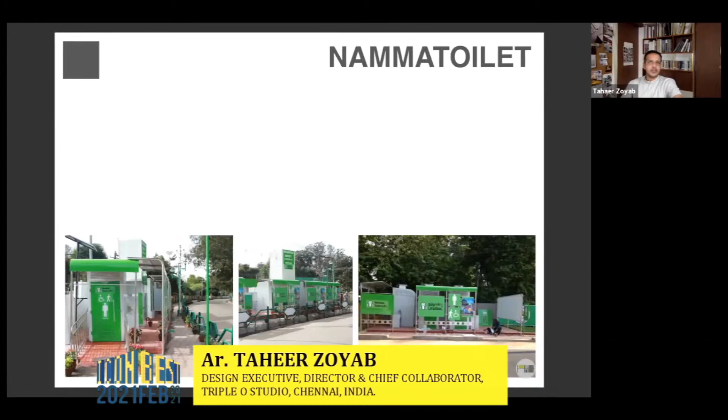So I'd like to start my presentation today with this project. This particular project, the Namma Toilet project, is a project that's very, very close to our heart, because while it is a public toilet and one would think that a project of this scale can be done pretty quickly, this entire project and the process took us about 2 years all in all to realize.

And what this project did more than anything else was cement our interest as a design studio in our understanding of collaboration, in our realization that collaborations are the way forward in case we are all wanting to up our level of quality in our work.

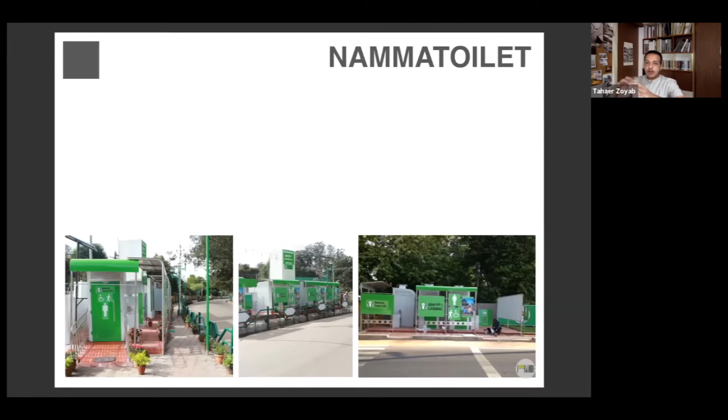So I say this because a project of this scale itself had a graphic designer, it had an industrial designer, it had a product designer, it had us as architects, it had a sanitation specialist, it had a fabrication specialist, and all of this was under the purview of the Commissioner of Municipal Administration, who looks after the ongoings of the state.

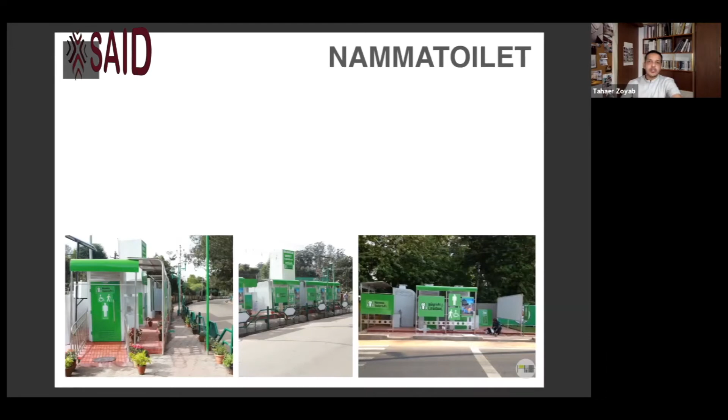And this was also from a studio's perspective an introduction to working in the public realm. So for me, this project is always going to be close to our heart, and we're very proud of the fact that this was awarded one of the highest and best practices in hygiene in the country.

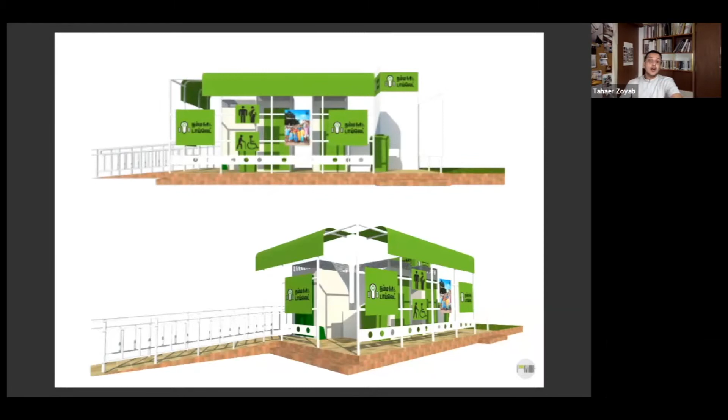Post that, as a studio, we continued this journey of working with as many different minds, as young minds as possible. I've always been interested in academia, and I continue to teach. And more often than not, our studio became the equivalent of a co-working space. We would all get together, exchange ideas, push ourselves in our own understanding of what can be done in terms of architecture. And there was exploration in terms of materials. We were questioning everything that we knew and understood in terms of spaces.

And this particular project also, it was called Design Against the Elements, and it was a project in Manila where we had to design public housing.

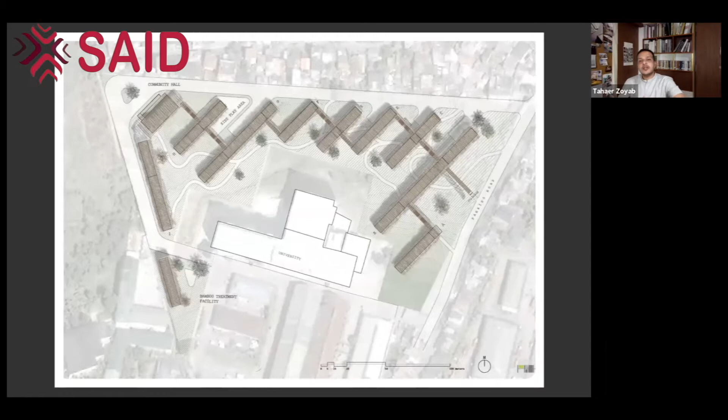This was the layout, and this essentially was housing for the university itself. So we had to accommodate all of the other elements, such as a play area, community hall, etc., within the entire housing block.

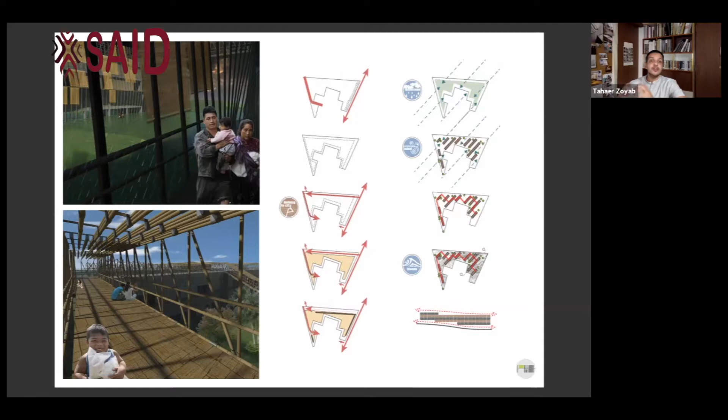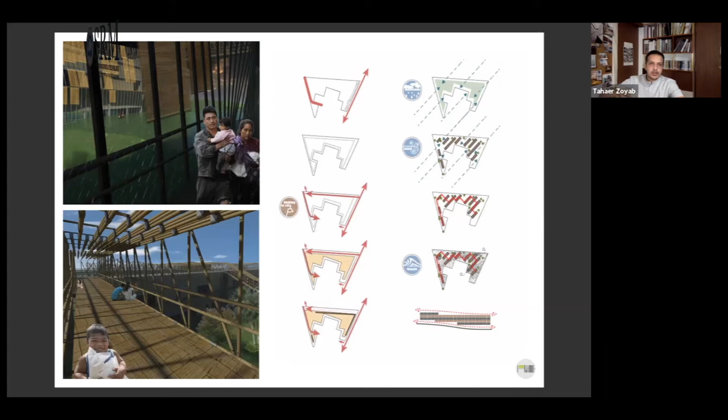The key thing, the reason it was called Design Against the Elements, was to ensure that this built structure would perform fairly well and keep people safe during a monsoon, heavy winds, or floods, which was very common in this area given the natural contours of the space. So we did not want to cut and fill the entire site and create issues for other areas, but essentially respected the natural contour and elevated our buildings slightly to prevent that. We spent some time exploring detailed cross sections.

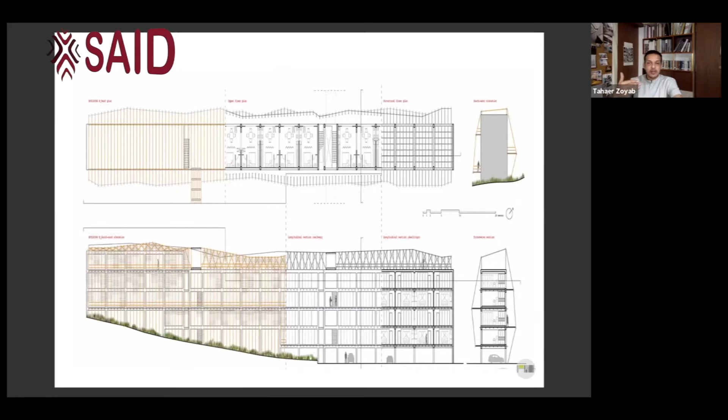What is interesting to me about this project is that the entire common corridor doubles up as a balcony and a congregational, social space in this design. All of the compact units are designed in such a way that there is a possibility for them to engage with each other, which we thought is something of a lot of meaning in a housing project.

We continue to push our understanding and our design journey in terms of creating spaces with dual character, or multiple characteristics, with the Spire Tech competition as well, where the larger brief was to essentially design an IT complex in Gurgaon. But Gurgaon, as we all know, Gurugram as it's sometimes called, used to be nothing but agricultural land before.

So we questioned whether we could find a way to bring some of that in, and create a marriage of that along with the high-tech infrastructure that's also coming up in parallel due to the sheer demand of this in a place like Gurgaon.

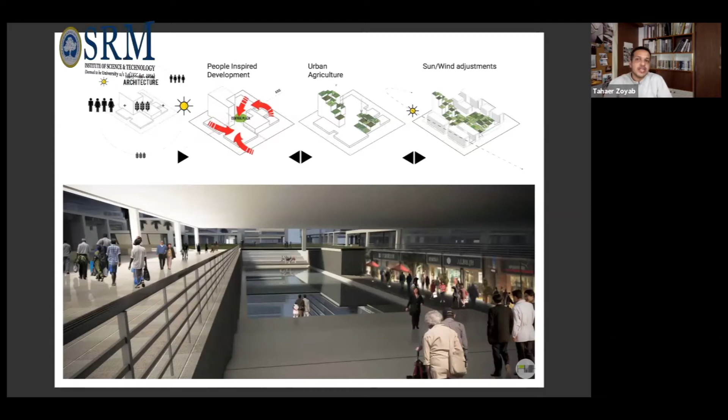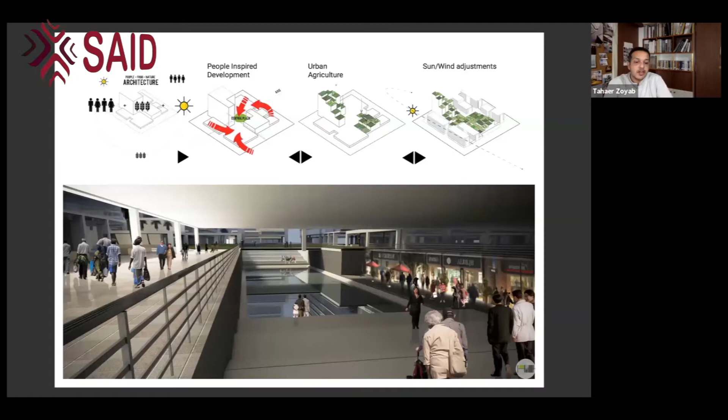So a lot of our early days as a practice and as a studio went into a lot of these explorations through such work. I'm not going to get into the details of the competition itself, but to summarize, we wanted to ensure that we activate a larger central space that is accessible to all, and we use as much staggered terrace area as possible to respond to the natural environment and conditions for urban agriculture. This was our first dive into understanding urban agriculture at this scale.

Coming to this project again, it's called Shift Focus. I think it's very aptly named because the project was to come up with ideas to look at what would make an ideal Indian street or an Indian road.

The diagram on the left suggests how, although most of our roads are made up of people like you and I that use these roads, a lot of the priority is given towards motor vehicles. This was something that we were constantly questioning, because there are so many things at play here, because the way we experience spaces around us, the way we experience our cities, is fully dependent on the way our experience on the road is.

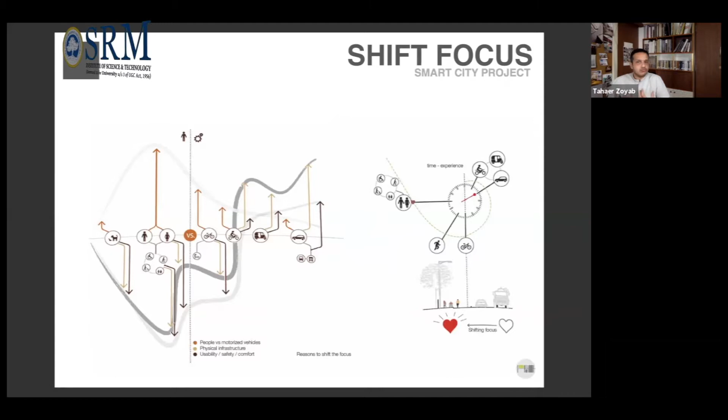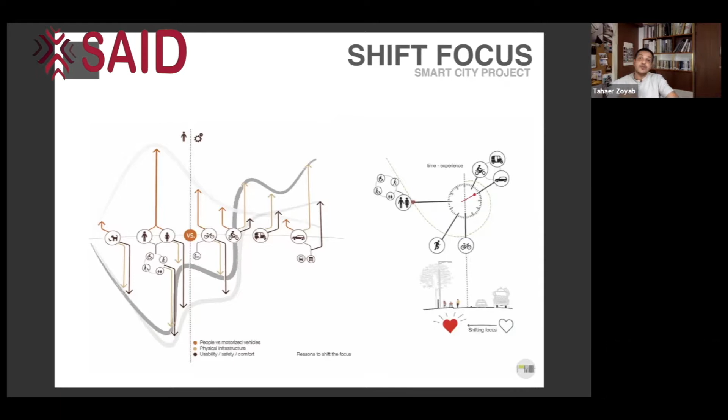If somebody is walking or jogging or cycling, the time that they have to enjoy that experience gets significantly more. And that itself is great reason for us to shift focus, which was what we were trying to do with this particular project. This was a project that we won.

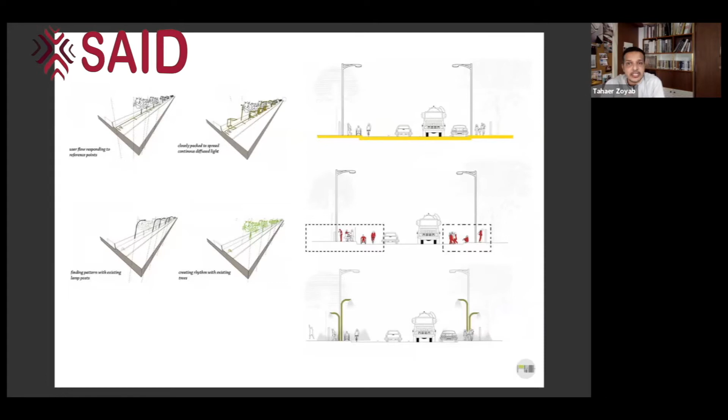These are some sections that highlight the importance of lighting, the importance of the way our roads are structured. There's not enough focus on people that may be physically challenged, and not nearly enough focus on a smooth transition or NMT in general.

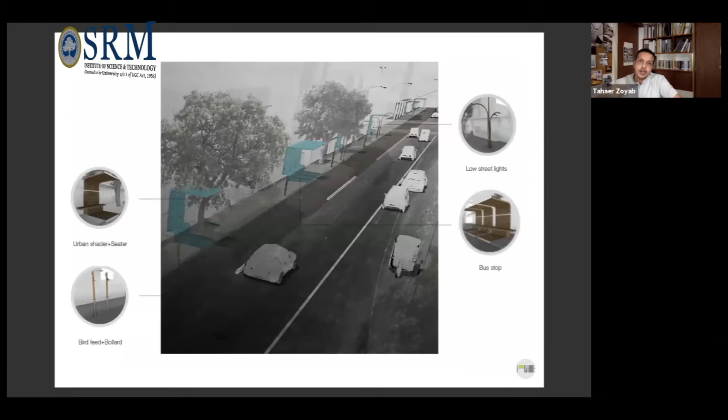In this particular competition, we again explored materiality. We used bamboo as a very unique idea to see whether that could work as a material in an urban context as well.

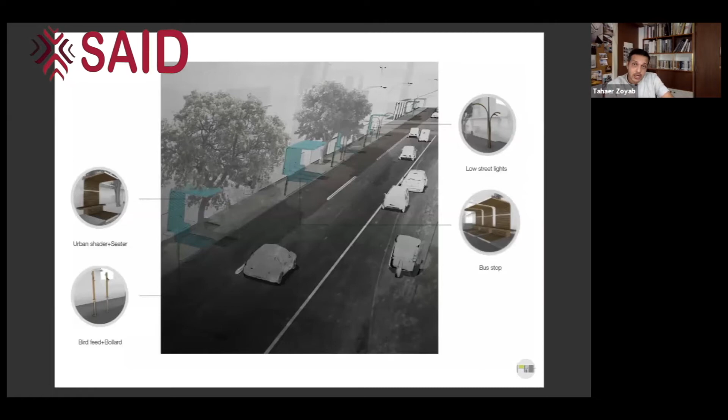These projects slowly led to this very interesting assignment, which I'll call a project called Houses of Mylapore, where I was called by a journalist, a friend of mine, to conduct a small little walk around Mylapore.

In spite of our studio being close to Mylapore, and me living close to Mylapore, walking through some of those narrow lanes was such an eye-opening and mind-blowing experience, because that really drove home the point of how little, especially as architects, we engage with our surroundings, be it immediate or larger surroundings. I think that is so crucial to the way we practice as well.

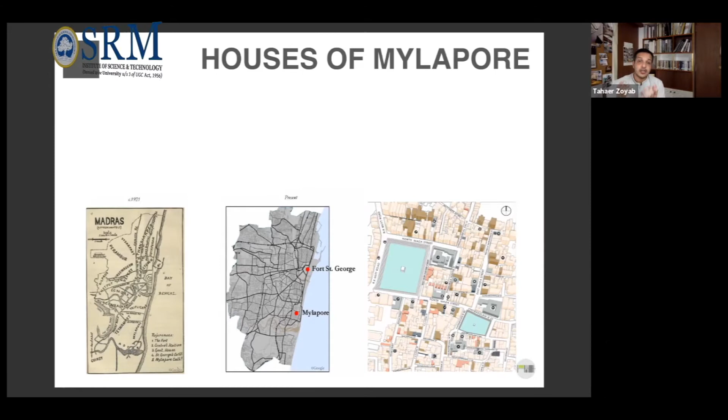So this opportunity was wonderful. We had a beautiful heritage walk in this area. We spent a lot of time researching the architecture, the evolution of Mylapore as a neighborhood itself, and we created maps like the ones you're seeing on the bottom right. One thing led to another, and we started getting obsessed with this.

The reason for this obsession was also something that shook us up very badly, which was we did the same walk a few months later, and within that span, a lot of what we saw before didn't exist anymore. These houses had all just disappeared. I think one of the reasons this doesn't come into the public realm or public news is because these are mostly in the residential segment, but there is such beautiful architecture to be celebrated in our city.

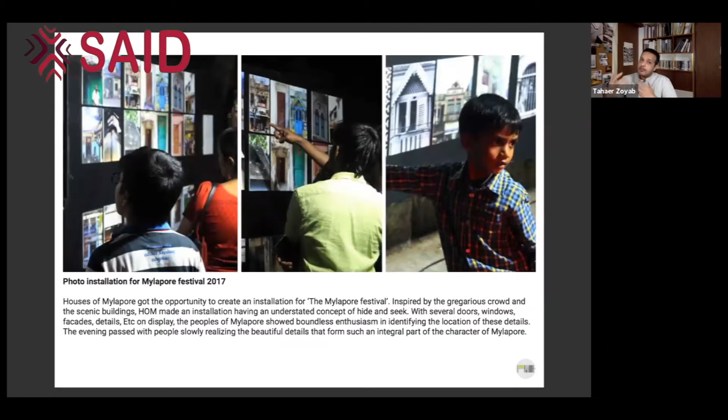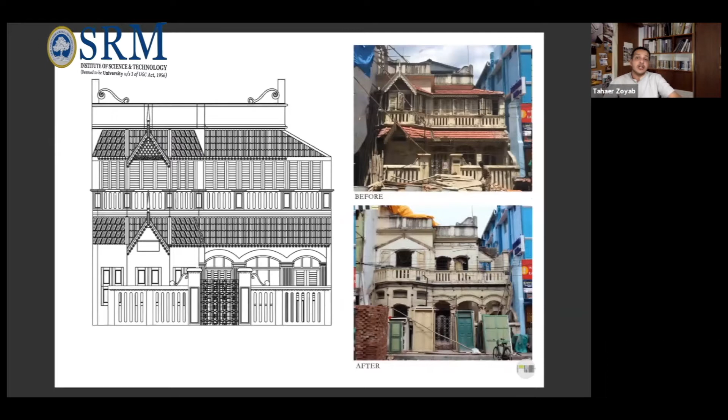We decided to scale this up, and this, in a sense, planted the seed for many of our projects which work in the heritage space, and eventually planted the seed for one of the initiatives we started called Madras Inherited, which I will talk to you a little bit more about moving forward.

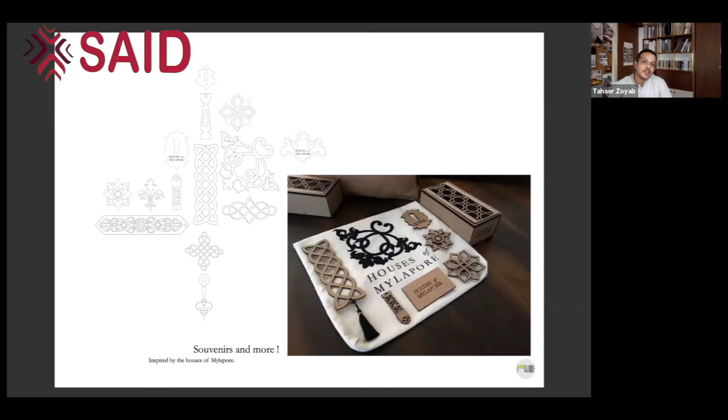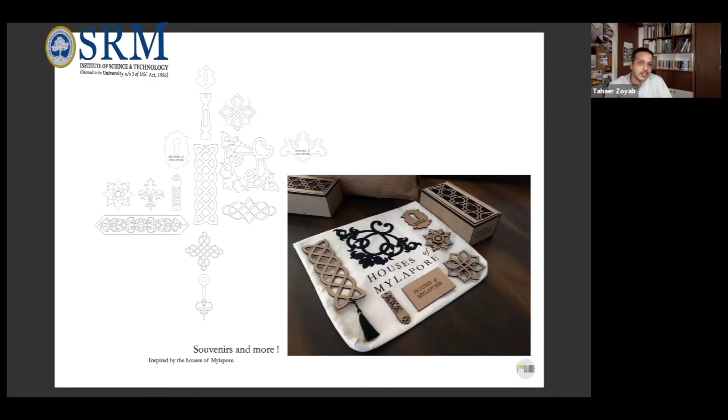This obsession and this celebration of the city translated into so many more things, such as souvenirs and custom designed, building inspired and built-form inspired souvenirs that we make now. These are things that we're very, very excited about as a studio.

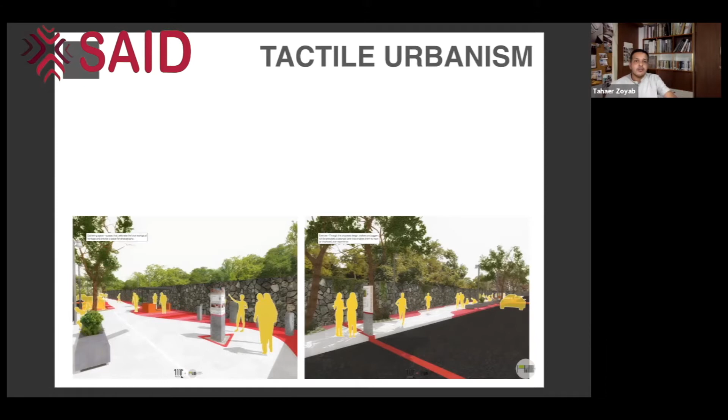Madras Inherited now collaborates with Triple O Studio to work on small scale urban projects, where the larger goal is to celebrate the city through heritage especially, but to also activate residual spaces and dead spaces in the city. We have so many examples of them all over most of our urban context, and this is a small proposal that we hope to see completed in a few months.

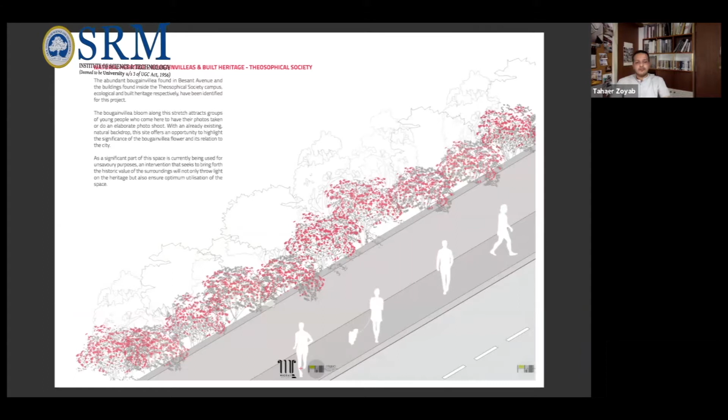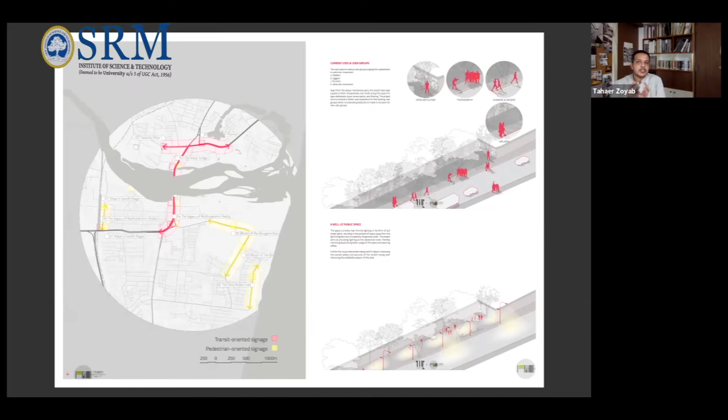Which is along the Besant Nagar stretch. If anyone is familiar with Besant Nagar, it is a neighborhood in the south of our city, which in a sense is enveloped by a large green lung space called the Theosophical Society. We essentially work with the compound wall of that and the road space, and we identified a small area that was being used badly.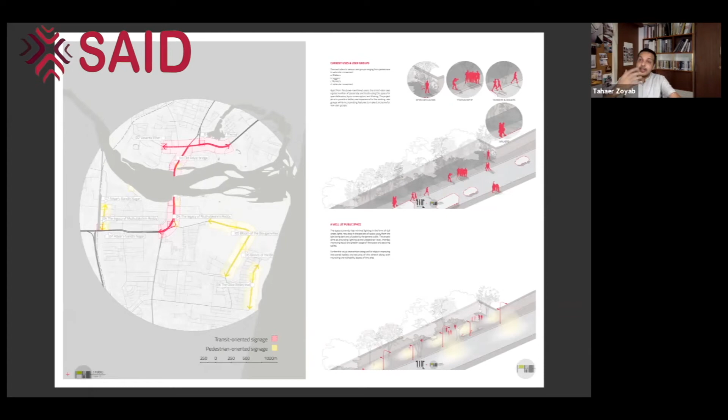It was being used as a spot for open defecation, in spite of being a popular spot where a lot of people would stop and take photographs. The bougainvillea is a beautiful flower that we had here, so in a sense this space that we created was a tribute to the bougainvillea. It's a tribute to the Theosophical Society, which acts as such an important part of this geography itself.

And our experiments and our work in trying things that were never done before continued at this particular project as well. It was very exciting for us because while some of the work I've shown you may be large in terms of its urban impact, I think as a studio we definitely think from pin to piano. We are obsessed with small scale product design as well.

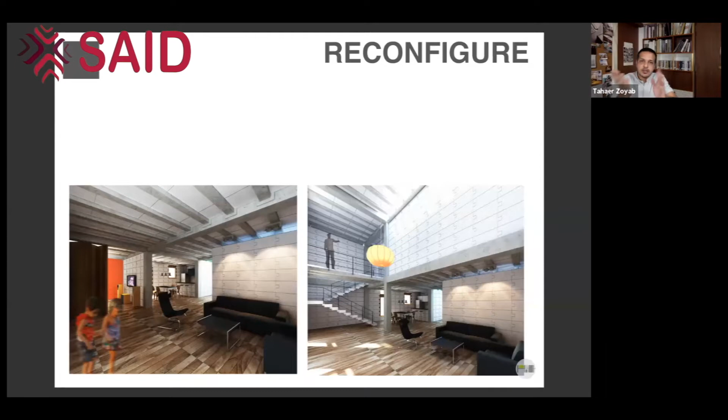This particular project was about how to create a house that could be flexible. So we called it Reconfigure, and we came up with detailing using aircrete and reinforcement rods to create wall surfaces that could easily be assembled and easily shifted elsewhere. This rendering in front of us explains how a normal living space could suddenly become a double height space as a result.

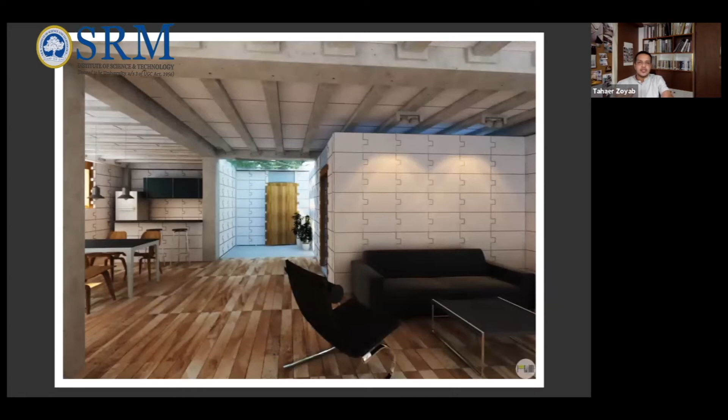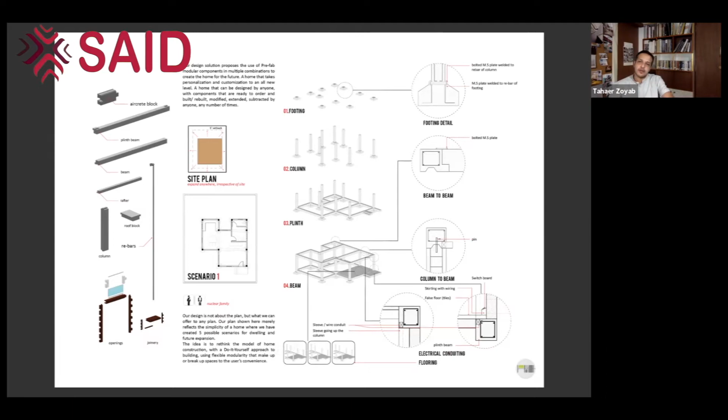These are some more views. I may not get into too much of the technical explanations, but on your left is essentially the toolkit that we used, and on our right are details as to how we envision making of the building. These are suggestions on how the detail itself would work for the wall, and how waterproofing would essentially work.

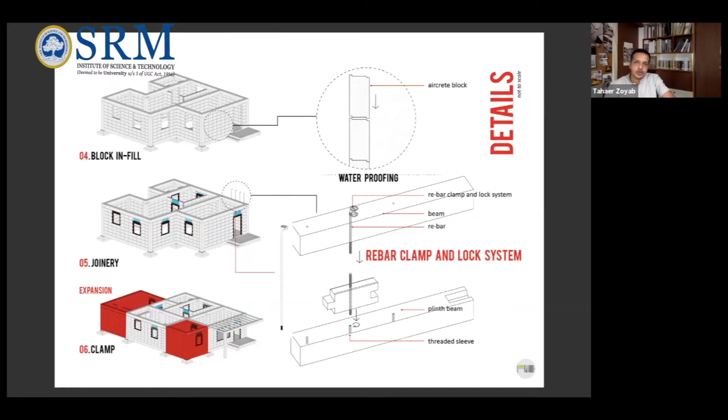This was another competition that we got recognized for. Competitions, as suggested multiple times earlier, are so important because they give us a great playing field for creativity. The competitions also allow us to immerse into context we would never otherwise get an opportunity to, and it allows us to ask questions about relationships between architecture, the city, and our own contributions as architects and space planners towards this constantly interesting relationship.

This particular project, in a sense, also celebrates that relationship, where we wanted to create a building in Helsinki for the Guggenheim Museum that could constantly be a building that was in flux.

So what I mean by that is, if you look at this visualization, some of the framework externally supports a lot of the work done by local artists and is constantly ejected in and out of this building. So the building is constantly in a dynamic state.

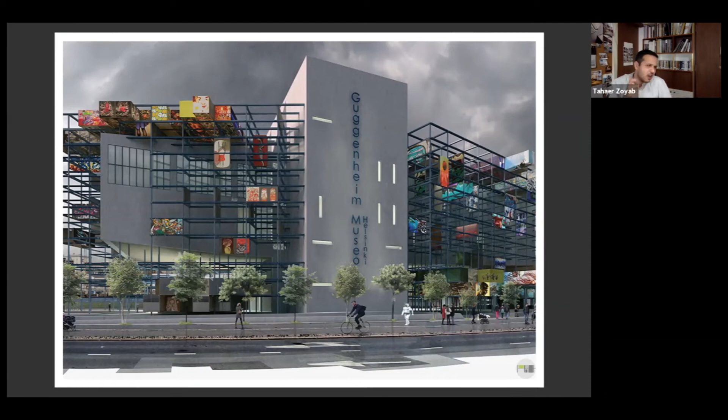I felt like this was an interesting way to approach the museum typology, because when we look at museums in our own context, I'm forced to ask myself, how many times do I go to the museum once I've already been there? So the idea was how to constantly get people attracted to the museum more frequently, and one of the best ways to do that, we felt, was to engage with the local.

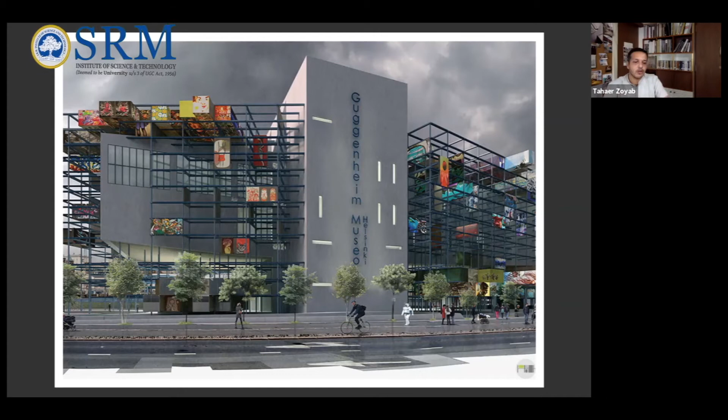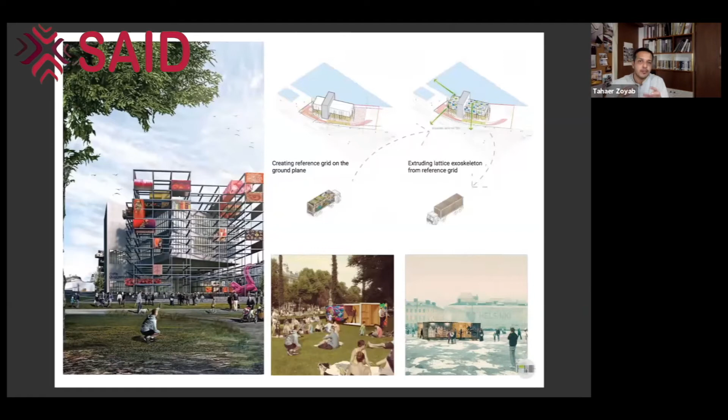These are other views that show how a simple container truck would go and be placed in different public locations within the city, then come back and be plugged into the building itself, constantly creating a building that has stories to tell on the exterior as well as the interior.

We were then lucky to have all of these questions pan out into projects of greater scale, and this is in Shimoga in Karnataka. All of this work with the city also helped us understand governance to some extent, understand how the city operates and how larger projects manifest and translate over time, and understand the politics of projects.

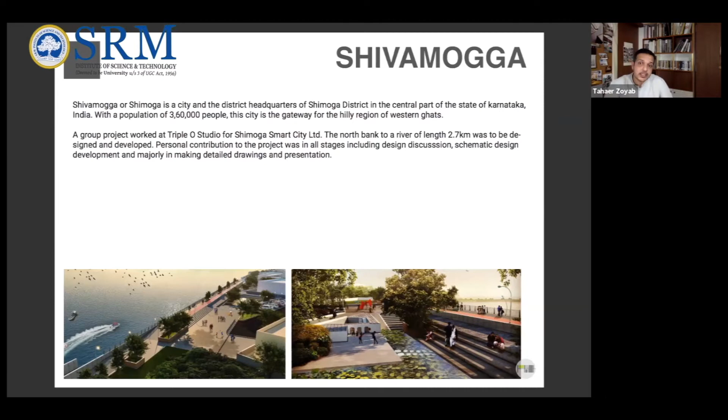So in Shimoga, when we went, we were shocked by a gigantic retaining wall that was built by the previous government. As a smart city project, our goal was to design a riverfront development that somehow factored in that wall, which was terrible for the river itself. We had to understand how to negotiate what was already done and continue to create spaces of relevance that would add value to this place.

Because in the process of making that gigantic wall, what it did was cut off the relationship between the community and the river, and it started creating anti-spaces, negative spaces that were used very poorly. That was the opposite intent, but unfortunately that was what ended up happening.

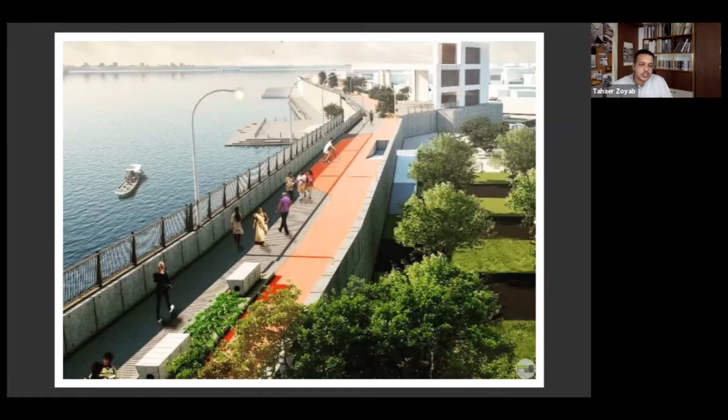Our goal was to approach this design not as one large 2.7 kilometer stretch, but break it up into the communities that basically engaged or responded to the different stretches. Some were purely residential in nature, some were larger religious conclaves, and each one had to be thought of slightly differently.

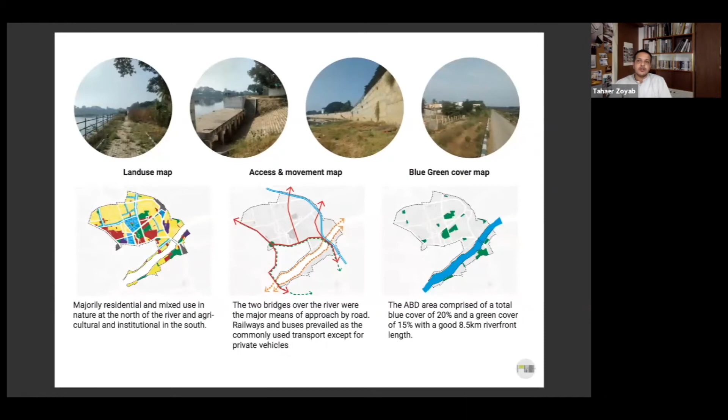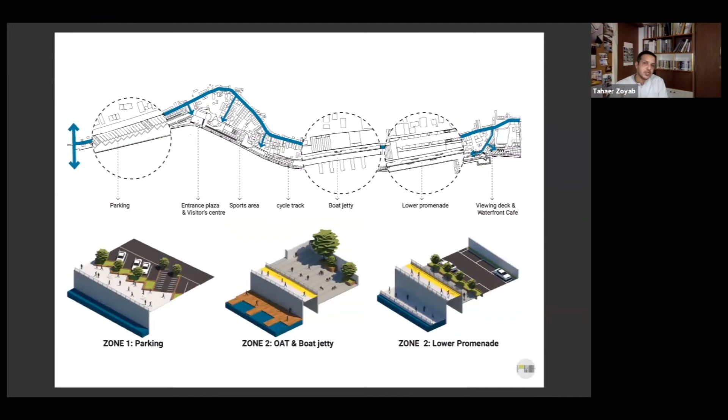For us, this was again a fascinating project to delve into. We looked at access in a big way, we looked at the blue-green cover in a big way, and tried to ensure our solutions were feasible and practical from that perspective. We split up our project into 4 larger zones that did slightly different things.

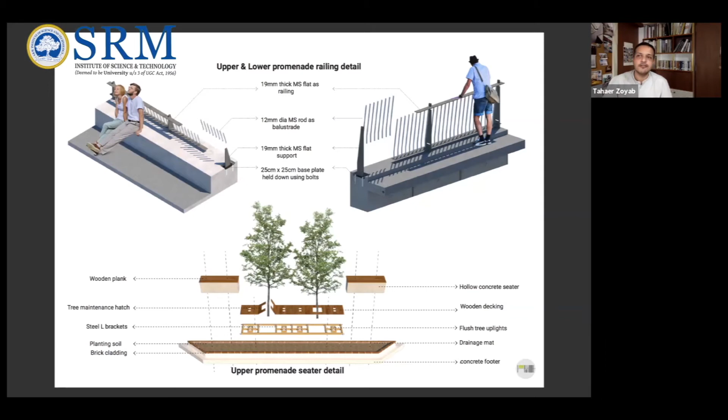This is, of course, detailing of furniture and detailing of railings. All of these elements are so crucial to the way space is perceived, especially in the public domain, because more often than not, I'm of the opinion that we sometimes design things to actually reduce the incentive to use them. I think that's a very important shift we need to see in the way we tackle urban spaces, and any large space for that matter.

In 2015, after the floods, I think our practice itself went through a sea change. We had to almost understand and ask ourselves very important questions, such as what are we even doing? Is our work even relevant? Are we really making a change and an impact that we want to make?

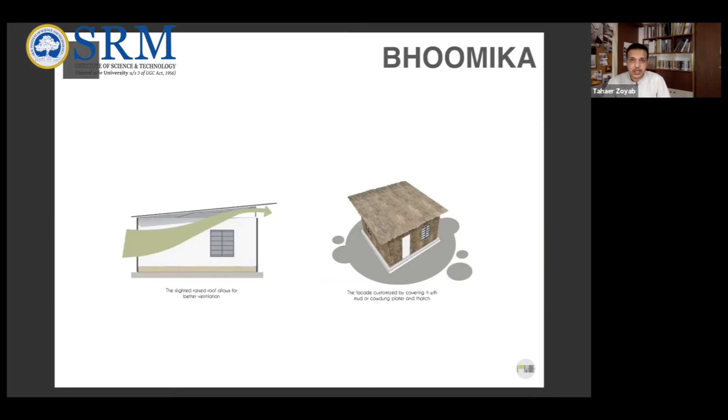We were very fortunate to work with the Bhoomika Trust, who were doing some wonderful work throughout the floods in terms of rehabilitation, supplies of basic essentials and so on. As a result of that phenomenal work, they received a lot of funding for infrastructure projects, and we worked with them on different low-cost housing projects that we implemented in remote locations of the very urban parts of the city.

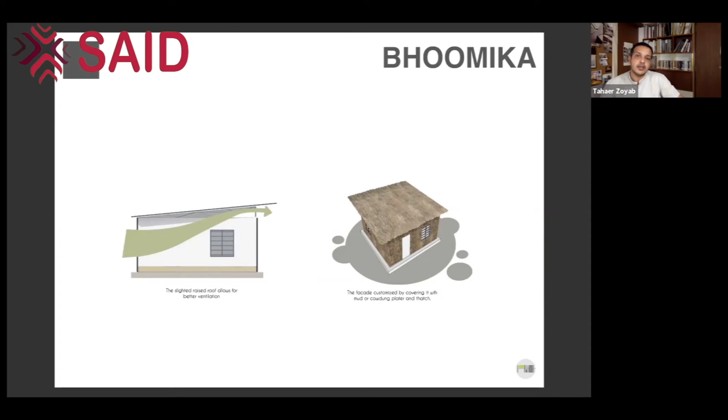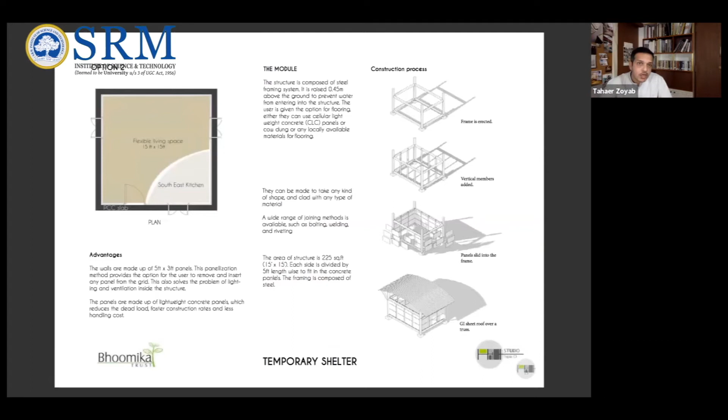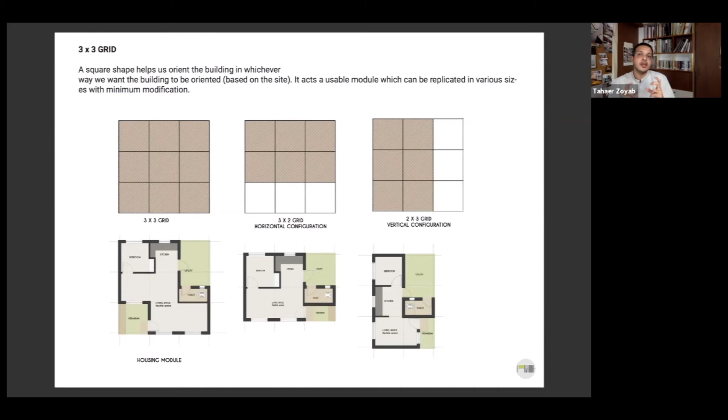We worked with them on not just temporary shelters such as the one you're seeing, but on actual modular housing, and on formal housing. This particular 3 by 3, 3 by 2, and 2 by 3 grid that you see here was an interesting take on housing that we implemented in Manamati, on the outskirts of the city, where this entire modular system worked when it was either flipped, mirrored, replicated, or reversed.

So what that did is slightly visible here, where open spaces got clustered up, and this was especially important because this addressed women's safety, this addressed social spaces, this addressed even just the dynamic within a household, and the importance of something as simple as the need for privacy in a space like a bedroom. And all of this was tackled at a very, very low cost.

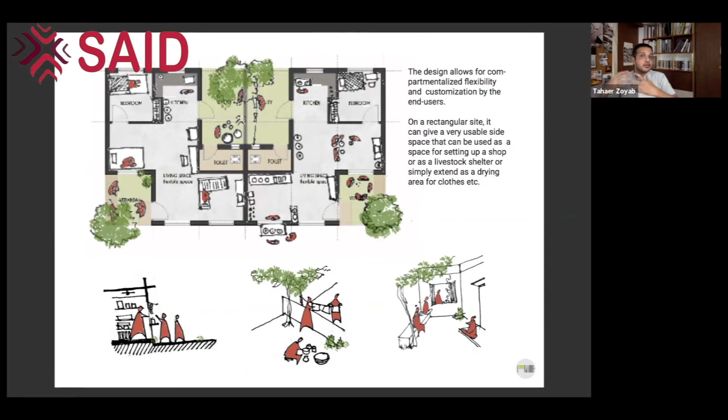And the process of actually translating this into a streetscape was very rewarding, because we were able to see the impact that this design had. And post which we've essentially been leaning towards work that has this kind of impact.

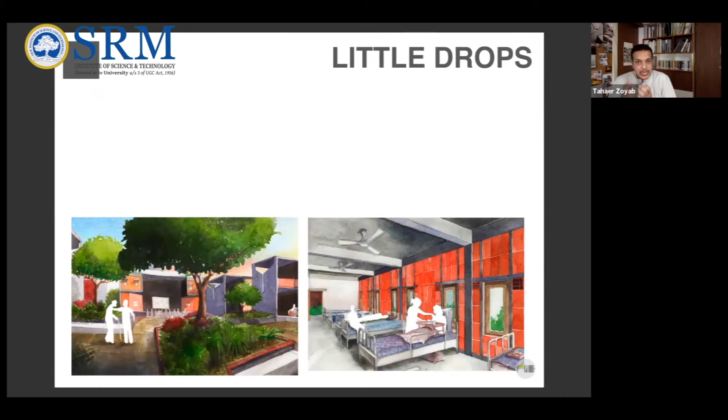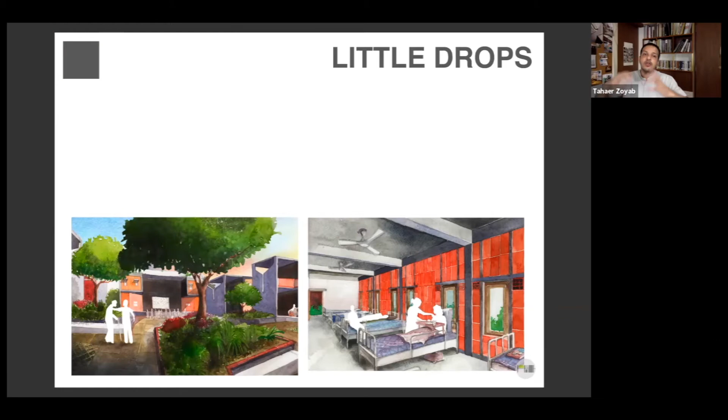So Little Drops is an NGO that runs an old age home, and they were looking for a new facility. One of the things we made was a beautiful presentation for them, completely drawn and colored. The idea here is how a courtyard would work. So we broke this large requirement of 400 plus beds into smaller homes that would each have a courtyard treated differently.

The idea was that you could get lost within this entire complex, but every place that you went to had something unique to offer. So there was a sense of safety, knowing that you're very much within this large complex, but at the same time, there is something to look forward to in every part of the space that you visit.

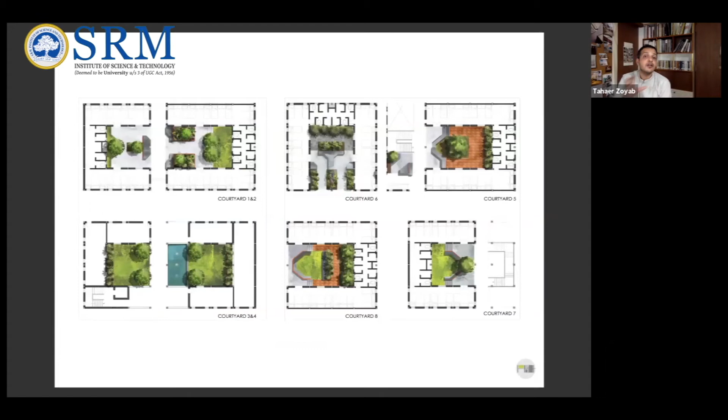So these show you how we've treated different courtyards very differently. In some cases, they are just plain surfaces for games to be played. In some cases, they're beautifully landscaped. In some cases, it's a mix of multiple features and so on.

This is what I mean, because this is a large area with a large set of requirements. And while this plan may look quite rigid, formal, and organized, it was the courtyards that essentially brought this entire project to life, in my opinion.

I'm going to conclude with this project because this is the nature of work that our studio is pursuing right now. Post-COVID, we've spent a lot of time thinking about the typologies of work that we want to do, the nature of work that we want to do.

I personally feel words like sustainability, etc. are sometimes abused, so I'm not going to use them. But we're now very conscious about ensuring that the projects we take up may be low budget, but we're very conscious about the impact that they have.

So we're currently working on a lot of schools. I think schools as a typology, for me personally as an architect, are always exciting. Any institutional project, for that matter, is very exciting.

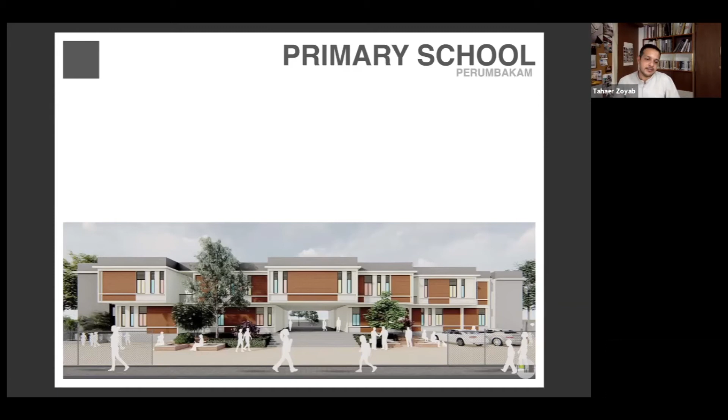This is a school that's coming up in Perumbakam. It's near completion. We worked with Porotherm blocks, again a new material for us, and it's beautiful to see how it's been shaping up, and how the material itself ages gracefully. I can see that over the period of the construction itself.

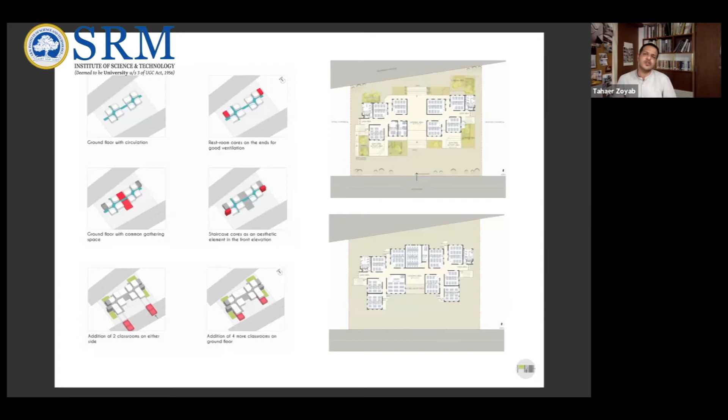One of the things we did slightly differently - this is a corporation school, to clarify - is that while the corporation has certain rigid standards of classroom size, access, etc., and the site itself isn't rectangular, we staggered our volumes a little bit and created a doubly loaded corridor, which is something you don't really see in most corporation schools, which have a very standardized template of design.

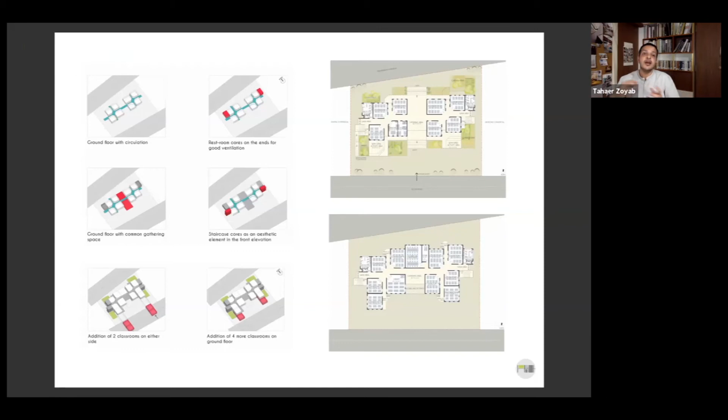So the doubly loaded corridor gave us multiple advantages, where there's not necessarily a front or a back to the school, and I think that gives it a much greater sense of scale, a much greater sense of spaces that you can access and enjoy. I'm very excited to see this shape up.

I'll conclude with this particular project, which in my opinion is a personal favorite - one reason is it's on my way home. It's close to my heart because of the effort, energy, and challenges that we faced to make this happen.

We were asked to work on the design of a foot-over bridge, and initially the bridge itself was meant to be private. But after studying OMR to a great extent - OMR is where this particular foot-over bridge is located in Chennai, it is the IT corridor of the city - and there are a lot of foot-over bridges there. All of them fail for different reasons, and one of the main reasons they fail is they are not the safest, they are not the most secure.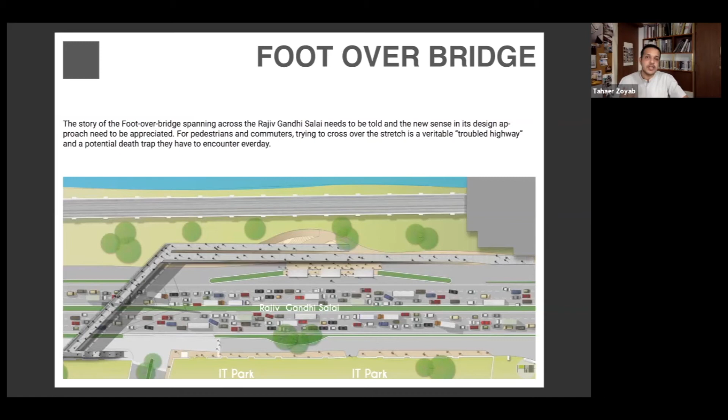They sometimes are covered with hoardings, which further adds to the lack of safety perceived in some of these foot-over bridges. We challenged all of these things and asked ourselves how best we could tackle it through design. One of the first things we did was make it as porous as possible, including the railing itself, and we changed the profile of the railing so that nothing about this bridge is conducive to vandalism or to the sticking of posters—things that sometimes spoil infrastructure or the way it looks in our city.

The single pylon structure right in the center acted as a beautiful support to the bridge. One thing we learned in the process was that the rules in our city did not necessarily allow a bridge to not be a foot-over bridge, to not be perpendicular to the road. That is something we challenged in the simplest of manners, which was to reduce the walking distance, and we were successful in that. I think that adds to the dynamism of this bridge when looked at from different angles.

On the left is the spatial quality you perceive while walking on the bridge. As you can see, it's well lit—the light is thrown on the ground, which is very crucial. The way we looked at some of these smaller things is something I'm proud of. The fact that most of it was pre-engineered, brought to the site and fixed, makes for its high quality in terms of execution as well.

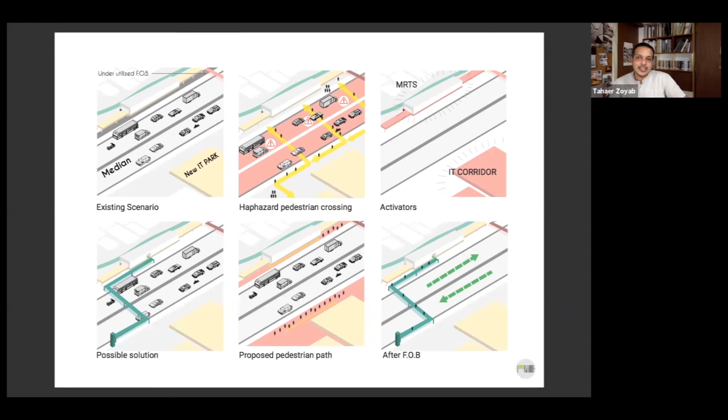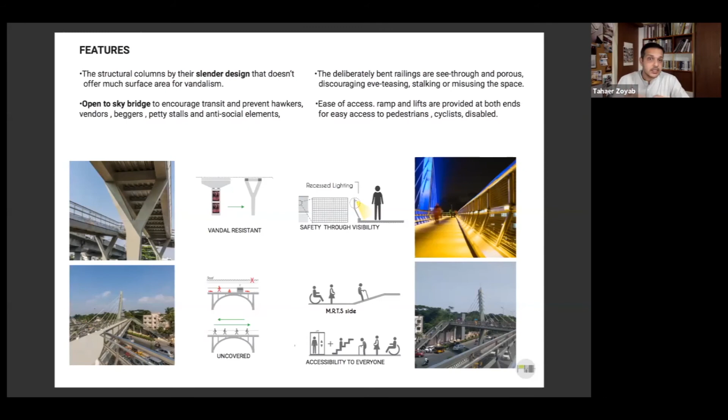These talk a little more about the benefits of the design detailing. Another thing we get asked often—since many other bridges in the city are covered—is why we consciously chose an uncovered bridge. In our opinion, at the end of the day, it's a space of transit; the idea is you don't spend time on the bridge, you use it to go from point A to point B. Even with hot weather and heavy rains, when you quantify this into time, I still believe an uncovered bridge works a lot better, for reasons visible in the diagram.

It discourages people from squatting. This will encourage everyone to use it because of the safety it adds, and so on. These are some of the very simple structural details—some of the cantilever beams that support the cable stay structure.

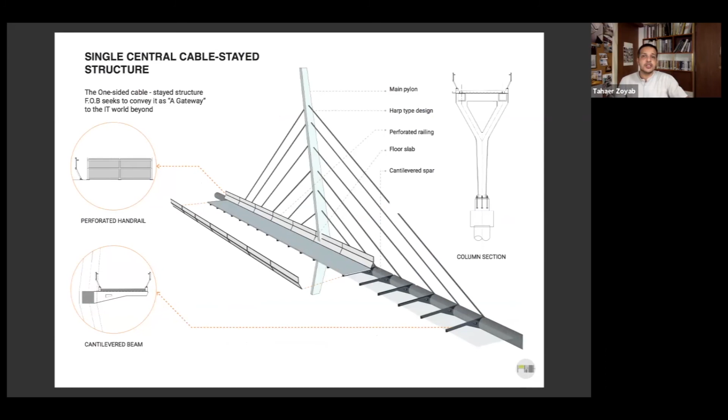With this slide, I would like to conclude my presentation. I would like to thank SRM University once again, and the School of Architecture and Interior Design, for giving me this opportunity. I look forward to all the amazing speakers' presentations. Thank you once again.